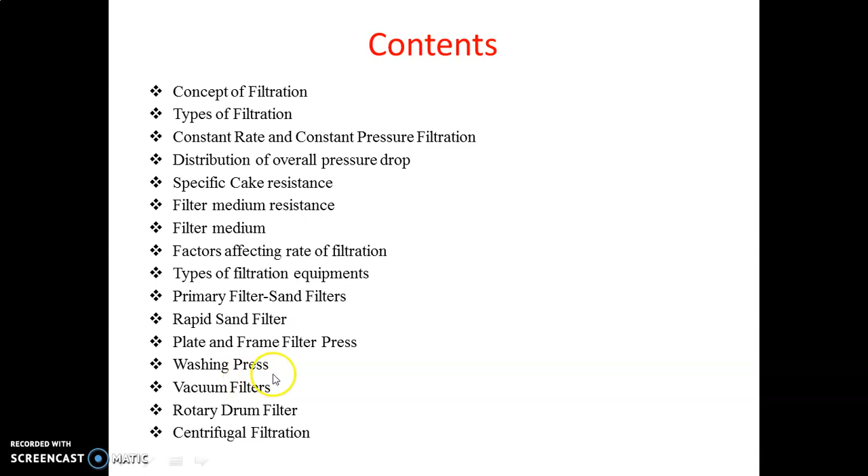Hello student, this video lecture is prepared for particulate technology subject and I will discuss unit number 4, that is known as filtration. In the last lecture I discussed the washing press construction, and in today's lecture I will discuss the working of that washing press, then the advantages and disadvantages of the plate and frame filter press, and then we will discuss the vacuum filters.

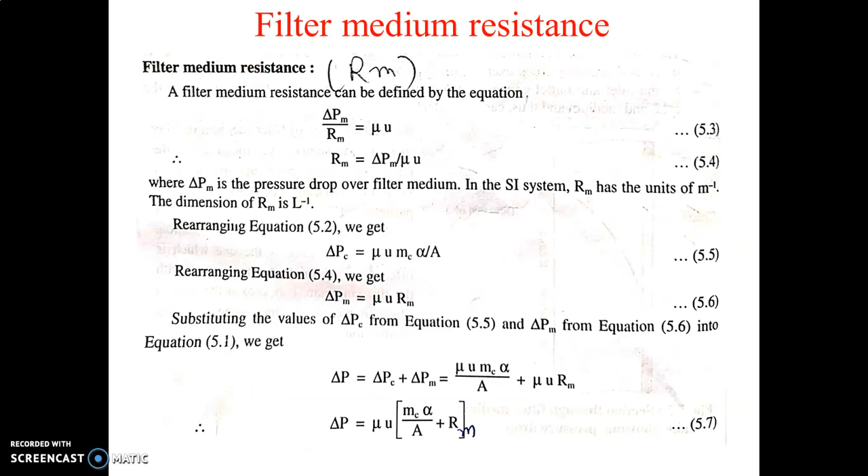So let us start the lecture. This washing press construction I had already discussed. This washing press is used when you have to carry out thorough washing. Thorough washing means complete washing of the cake. At that time you have to use these washing plates. This part I already discussed in the last lecture.

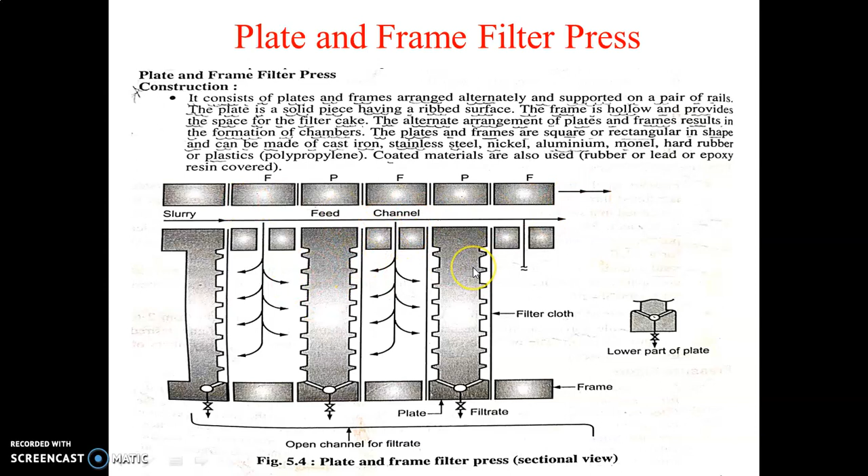So these are the two types of washing. In this case you just feed the wash liquid here, so there is no third plate. But in the case of the washing press we have a third plate and two channels are formed. In the previous case one channel is formed. In this way we can carry out the washing, and this is called a washing press.

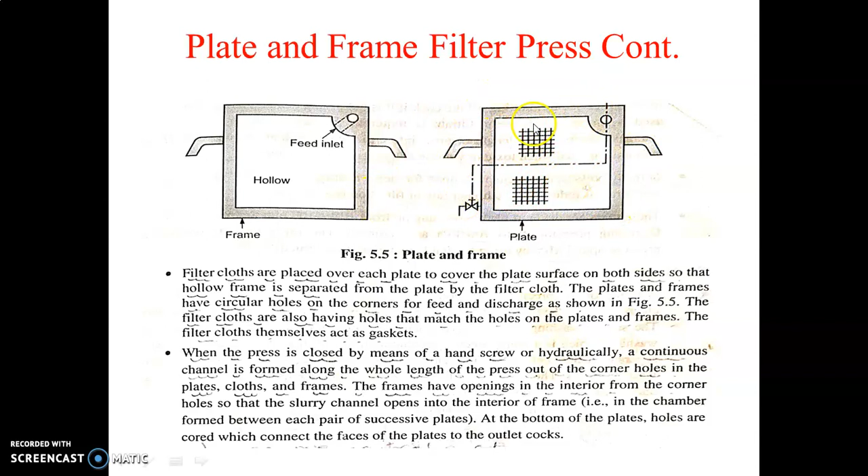Then we will discuss the advantages and disadvantages of the plate and frame filter press. So what are the advantages? Simple in construction, low first cost, that means purchasing cost is low, and maintenance cost is also low. It provides larger filtering area per unit area of floor space occupied. This is the larger area because the filter cloth is placed on this plate.

Then high operating pressure can be easily obtained. We have already discussed that 700 kilopascal or 0.7 megapascal pressures may be applied. It is possible to alter the capacity. Capacity means how many liters of liquid per hour go through this plate and frame filter press. We can change the capacity.

Then, the majority of joints are external, so leakage is easily detected. If we look at this figure, the joints are visible from outside. So if there is leakage, we can easily detect that leakage in this case. Then,

flexibility. Flexibility means operating conditions. You can change the pressure of that plate and frame filter press, inlet pressure, outlet pressure, or you can change the capacity. So this is called flexibility.

And the disadvantages are: labor requirement is very high. You have to open this press after the filtration is over. You have to remove this, and you have to take out these plates and frames separately, and you have to scrape that cake from the plate surface. So the labor requirement is higher in this case.

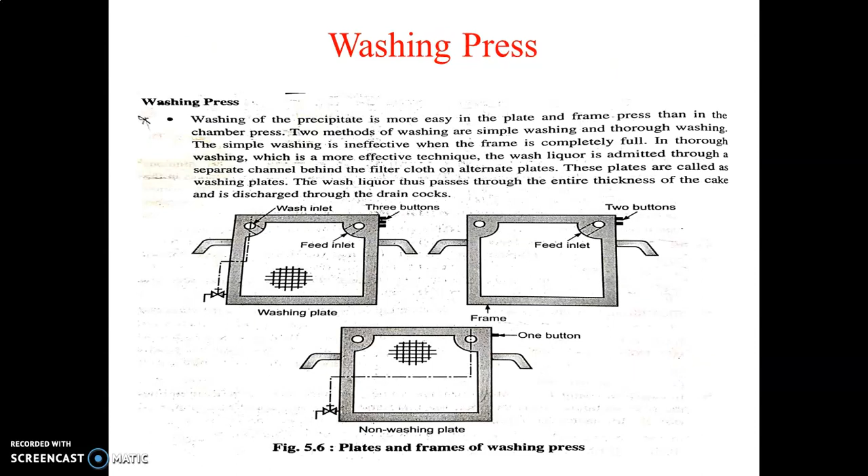Presses frequently drip and leak, making housekeeping in the area a problem. That means the leakage problem is the most important disadvantage. The filtrate may leak from these points and it will wet the area. Wet means W-E-T, wet the area where this filter press is placed, and you have to remove that water or filtrate from that area. So this is called housekeeping. Okay, so housekeeping is a major problem.

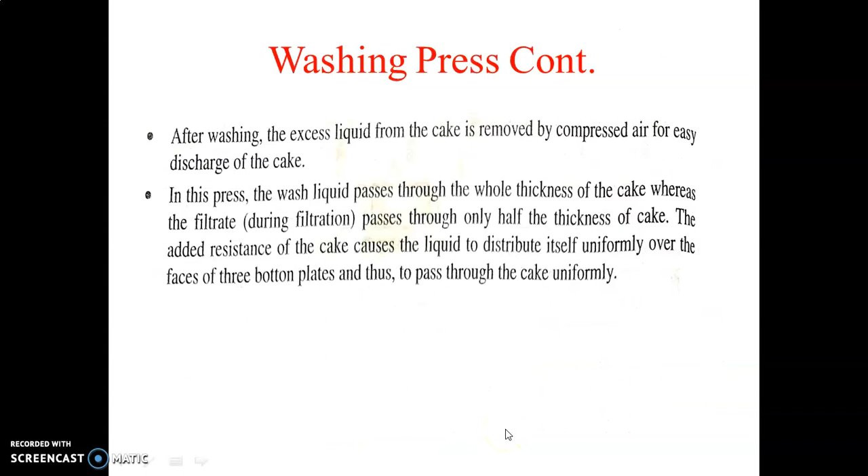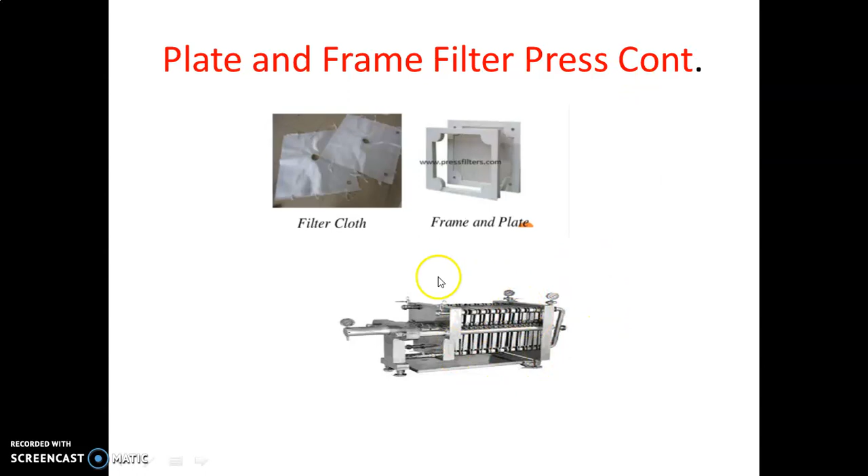Then washing of the cake is likely to be imperfect. If we are using only simple washing, it is imperfect washing. So why is the washing done? To remove the impurities which are present in this cake. For that purpose we are doing the washing in a plate and frame filter press. So the washing is imperfect if you are using just simple washing. Okay, so these are some advantages and disadvantages of the plate and frame filter press.

Then we will move to the next filter, that is called a vacuum filter. So first, what is meant by a vacuum filter? Filters which operate with less than atmospheric pressure on the downstream side of the filter medium and atmospheric pressure on the upstream side of the filter medium are referred to as vacuum filters.

Okay, so you have to operate at less pressure on the downstream side. Suppose this is the downstream side of this filter cloth or filter. Then you have to apply the vacuum here, and atmospheric pressure is on the upstream side. So this is the upstream side. Here you apply the vacuum, and here you apply atmospheric pressure. So a pressure difference is created, and by means of that the filtration is carried out.

So first, what is meant by vacuum? Vacuum is nothing but any system which is operated at a pressure below 1 atmosphere. 1 atmospheric pressure, as we have already discussed, is equal to 760 millimeters of mercury. So if we operate any system below that pressure, it is called a vacuum system.

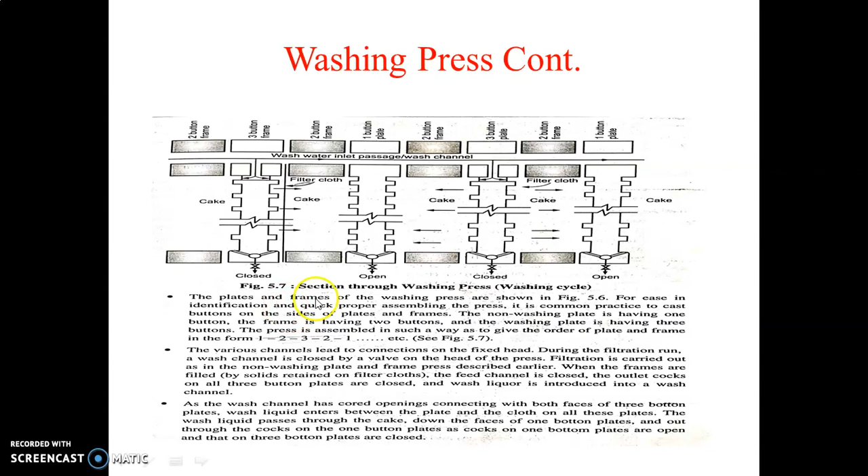So here I would like to conclude today's lecture. In this lecture we have discussed how the washing press works, and then we discussed advantages and disadvantages of the plate and frame filter press, and the remaining part we will discuss in the next lecture.